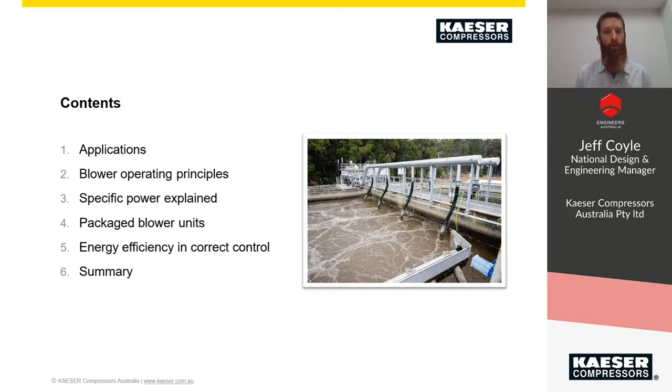Firstly, what I'm going to be going through: I'll cover some of the applications for low pressure blowers and air compressors, then go through some of the blower operating principles, and touch on specific power and explain why it's important. Then I'll go into packaged blower units and energy efficiency in correct control, because that's important for a modern low pressure blower station, and finish with a summary.

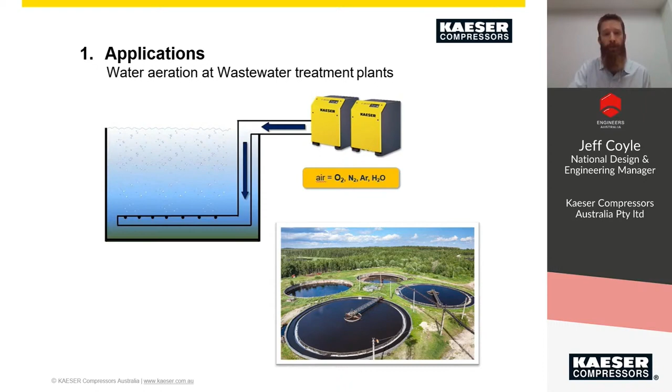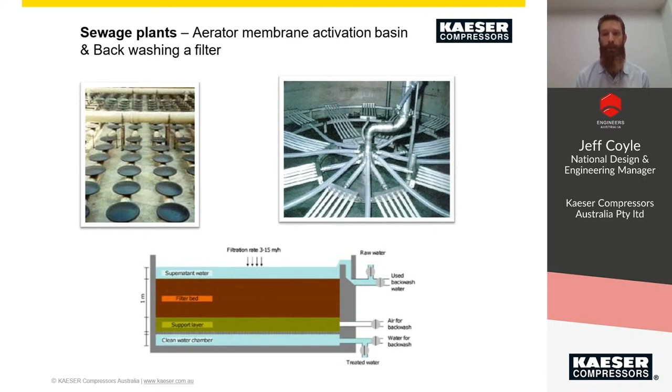Another application, also within the water treatment plant, would be backwashing filters. Often in some water treatment plants, there are very large filters with some sort of filter bed, and they blow low pressure air over them to get rid of all the contaminants out of the bed. That's what the bottom picture shows, a cross section of such a filter with air for backwashing. That would be a separate blower system. So again, these are probably the most used applications for low pressure air blowers.

When I talk about low pressure, I'm talking about an air pump of some description that would go up to a maximum of about 1 bar gauge, which is twice atmospheric. We class that in the industry as a blower, and I'll go into the different technologies that can produce that. A typical water treatment plant would use around half a bar gauge pressure to aerate water. Pneumatic conveying systems would probably be a little higher, maybe up to 0.8 of a bar, to transport that medium. So those are two examples.

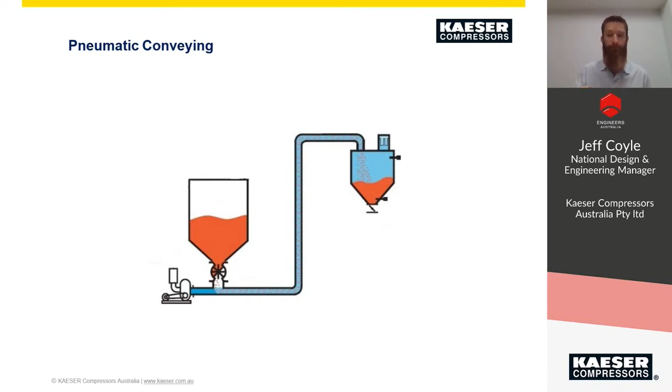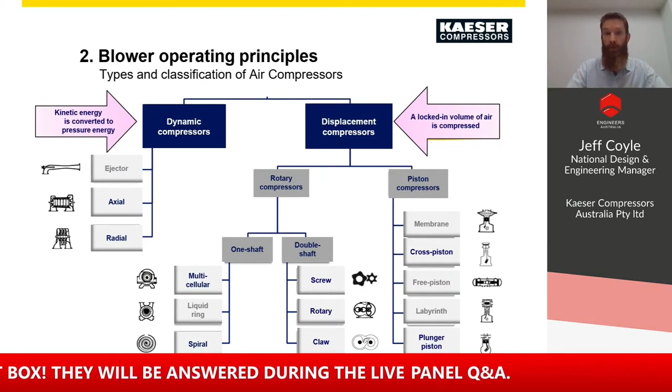Moving on to displacement compressors on the right, that's typically for higher pressures, but there are some low pressure blower technologies within that, really in the rotary compressors - you can see we've got one-shaft and two-shaft types. When we're talking about low pressure, probably the most commonly sold low pressure blower would be a rotary Lobe blower, which is a double shaft one, the second from the bottom. In old school terminology we'd call it a Roots blower, but Roots is actually a company that makes them, so technically it's a Lobe blower. We also have a screw compressor there, so you can get screw blowers, which I'll talk about later as well for the low pressure sector. Those are the two key ones, I'd say.

And then on the very right-hand side of this map, we've got piston compressors. I don't think you would use any piston compressors for low pressure applications, just because of the maintenance needed for a piston compressor. Piston compressors really come into their own at very high pressures.

That's where they're really used, where you multi-stage them to get extreme pressures for PET bottling or diving, those sorts of things. So I think the three main ones would be: a dynamic compressor, a turbo for the low pressure sector, as well as rotary lobe blowers and rotary screw blowers.

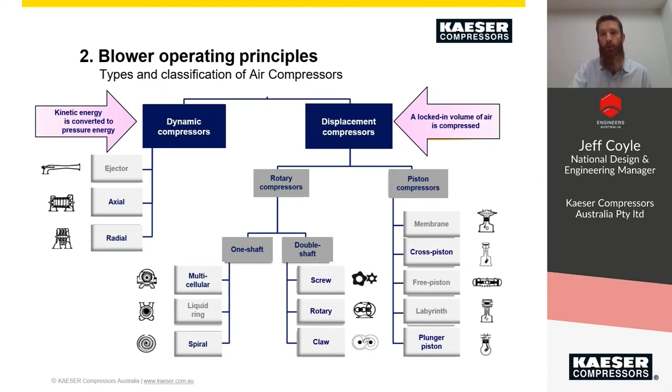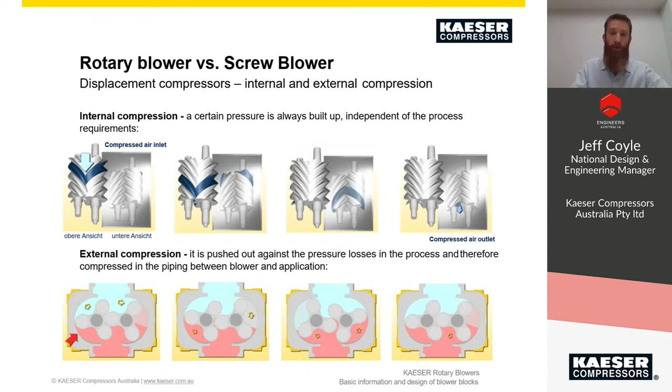So here's a little chart that shows a PD lobe blower versus a screw blower and where you might use them. Again this is very general, but for the purpose of educating fellow engineers, a screw blower you'd want because they have internal compression to work at pressures maybe over 400-500 millibar to get value for money. A PD blower can work right up to 1 bar no problem, but certainly comes into its own at lower pressures - so for an application at say 300 millibar, a lobe blower would be nice since you don't need that internal compression.

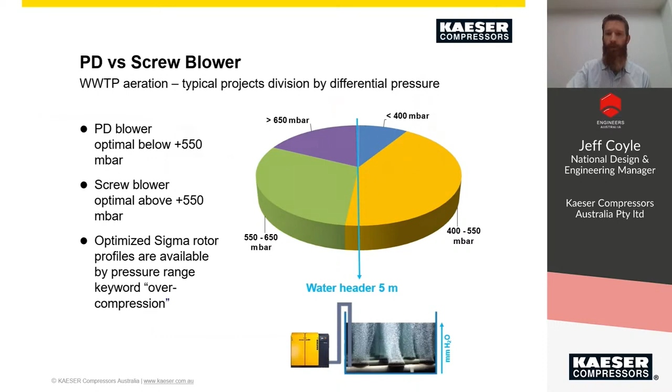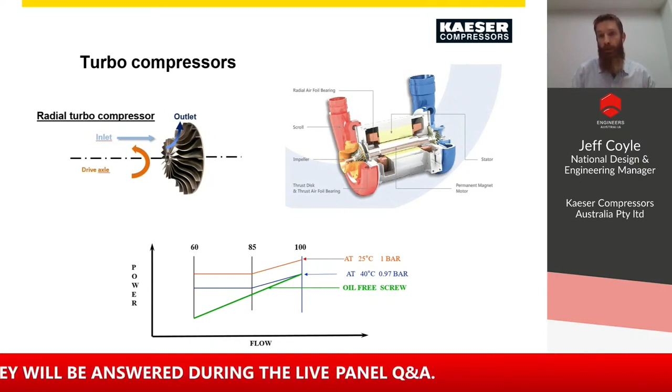And it gets sort of shot out the top there. So that's essentially how the turbo compressor works. It's no different to the turbocharger you have on your car, but obviously a fraction larger. And yeah, that's a turbo compressor.

As I said, they can be quite efficient at a set point, and that would be the key. I'll touch on that a bit later on. Also, they are affected by ambient conditions quite a lot because the mass of the air is crucial to creating the pressure, and with different temperatures, the mass of the air changes. With lighter air, so more humid air, the pump needs to work more to create the pressure because it's less mass. So yeah, there's things to consider.

So certainly, if you're looking at turbo compressors, you will need to speak to experts about how to go about designing that. I think the next presentation will touch on some of those key principles. But there is a lot more to think about with a turbo compressor in regards to design and how we go about design and keeping it quite smart in design.

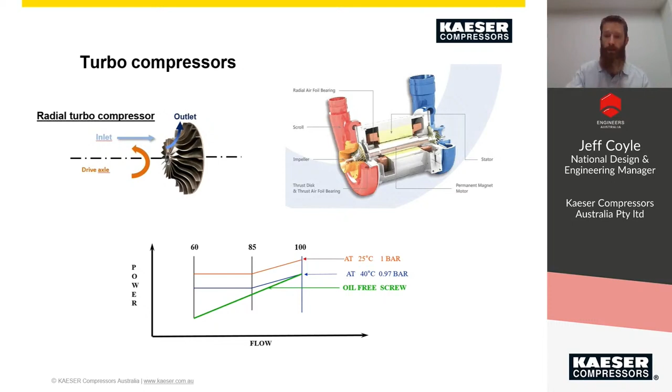As far as PD blowers, you can see they do use a little bit more power, but they are very simple and very cost effective to acquire and purchase. So there's always a trade-off, I guess, with anything in life. They each have their place, really. Certainly PD blowers are the most prolific out there that we see, for good reason. They're simple, they're affordable, and they're very easy to maintain and service. Whereas turbos are very specialised and can be quite costly to overhaul.

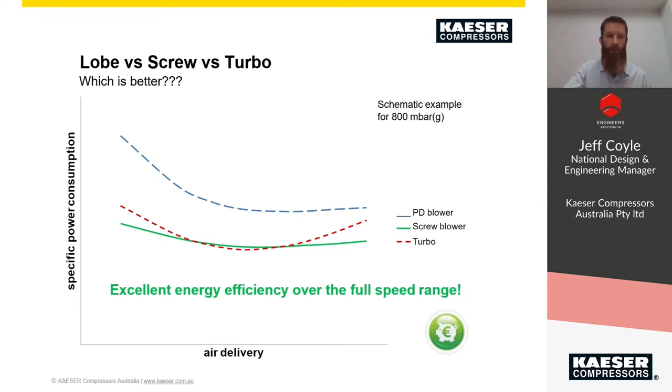So a bit of food for thought there as far as efficiency. And you can see that we've got specific power as our power measurement, which I'll talk about later on. Actually, right now.

Moving on to part 3 and specific power. So why am I talking about specific power? Well, obviously we want to make sure that anything we're designing, we're keeping it the most energy efficient we can. This specific power is a unit of measure that us in the industry use to benchmark equipment, electrical equipment, so that we can see that we're talking apples for apples, or we can make smart decisions on asset purchases based on power and those sorts of key critical factors.

So specific power is at the bottom there. It's explained as the total power input to the unit divided by the air output or the air delivery. So it's a unit essentially, and you want it to be as low as possible. So you want to have the least amount of power to produce essentially, say, 1 cubic meter, a measure of air.

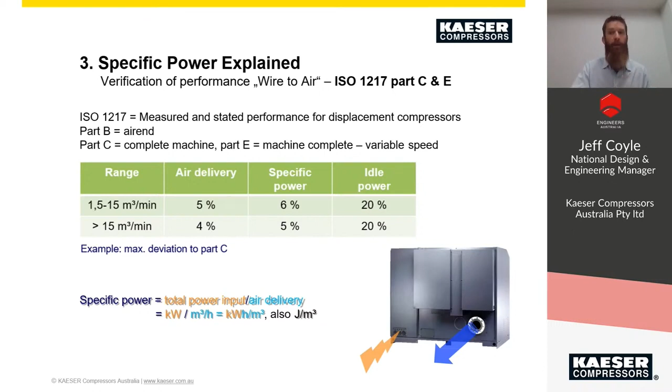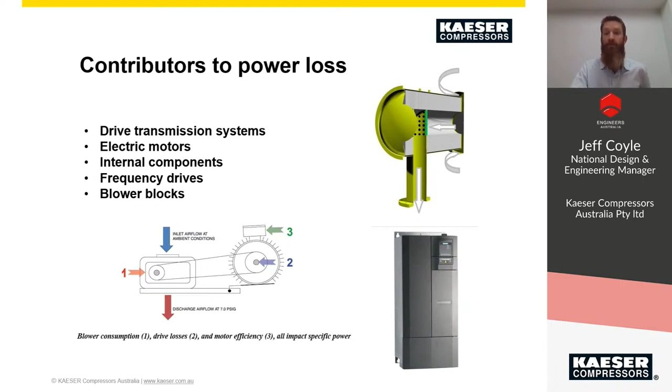So what affects power consumption? Obviously there's lots of contributors to power loss. We have drive systems, pictured in the middle as a belt drive system, and there's losses in that. Maybe you want to look at direct drive blowers, which are available. Electric motors come in different efficiencies. Internal components like the inlet silencer restrict flow and inlet pressure, creating more power usage. Frequency drive systems also have losses in them. And the blower itself, how refined and efficient the block is. They all contribute to power loss.

Why are we talking about this? Why am I here talking about low pressure blowers? Well, most towns and cities have water treatment plants because our sewage needs to go somewhere. The industry says 50% of sewage treatment plants' power usage is related to low pressure blowers. They have huge motors, sometimes over 100 kilowatts, and maybe 4 of them on site. They're huge power consumers. That's why I'm here, to create awareness that this is, in my opinion, the first point of call with a treatment plant, or even a manufacturing plant with pneumatic conveying. They consume a lot of power, so we need to highlight this - if you want to save energy, look to these pumps as a first point of call.

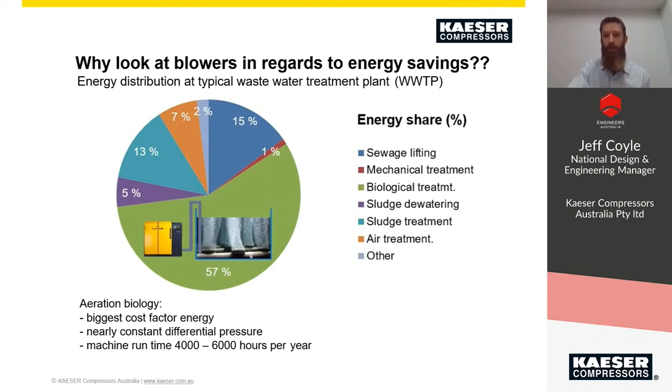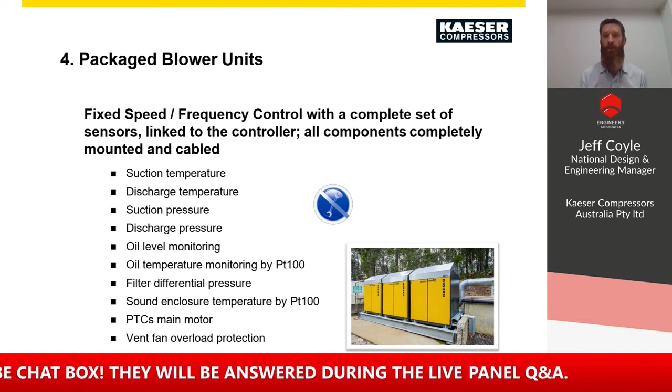So packaged units - this is more about the blowers themselves. A lot of them are custom made to order because we have different pressures and flows to consider. We have a lot of control in them these days - sensors and monitoring, PC-based controllers, and frequency drive systems. Monitoring and control is a big part of a modern blower station and keeping it efficient, because you can have the most efficient blower in the world, but if you're not controlling it intelligently, it's a waste of money - it could be running unnecessarily or switching too much, creating losses. That's why PC control, whether onboard controllers or a master controller managing big banks of blowers, is important. Looking to control is as important as anything in a modern air compressor station, whether high or low pressure.

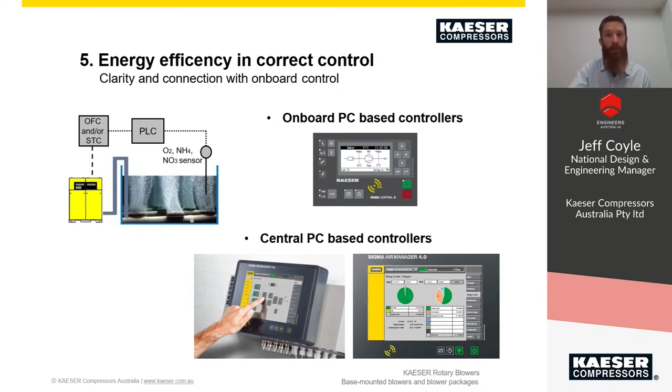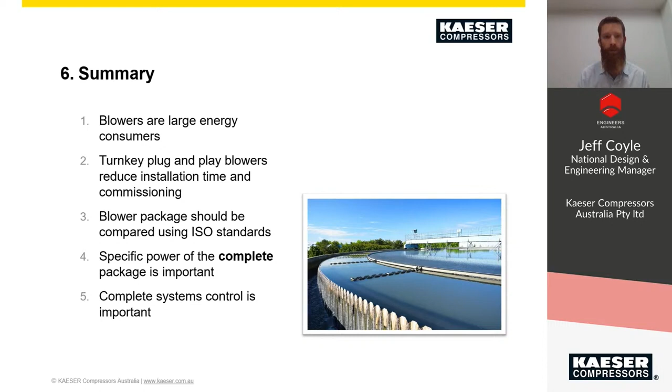If you need more information, speak to manufacturers or experts in the field, because it's a very important sector. That's a lot of information in a quick time frame, but it was a general introduction to low pressure blowers. As I said, they are large energy consumers, that's why we're here talking about it. There are a lot of different options out there: turnkey blowers, with or without frequency drives, and more. As engineers, you should always look to ISO standards for benchmarking - it's important that everyone compares apples to apples. Referencing specific power is key so we can look at the right figures when designing, and control is very important these days. That's it from me, thanks for your attention, it's been great to speak about low pressure blowers today.

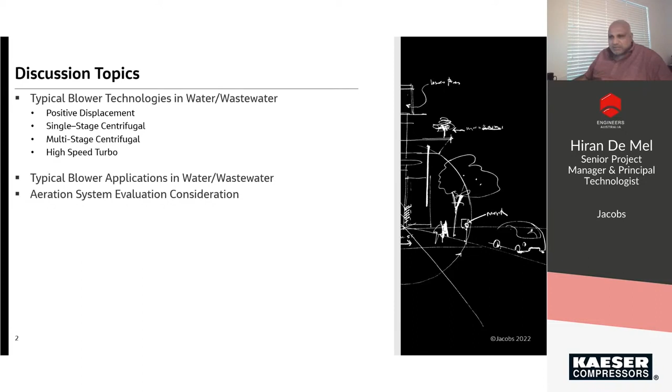Okay, so when it comes to blowers, I believe there are mainly two different kinds. There's the positive displacement blower, which is just like a PD pump, it's a positive displacement machine. And then there are centrifugal blowers. So as you see, there's positive displacement, and then all of the other three categories up top are all part of the centrifugal family of blowers, similar to a centrifugal pump. It has a rotating impeller that uses centrifugal forces to generate the pressure, whereas with the positive displacement blower, you have a rotor-stator arrangement that pushes the flow through the unit.

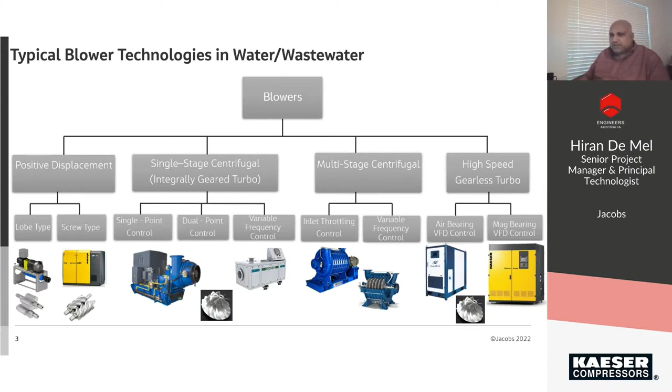Okay, going to the next slide. When it comes to rotary positive displacement blowers, these blowers have been around since the mid 19th century, and they were initially invented by, they were also known as Roots blowers, and Roots blowers—many different vendors have since adopted that design.

Rotary lobe blowers are ideal for small to medium size plants, variable depth reactors where the water level varies, like in a digester, or equalization basins where the water level fluctuates, or a filter air scour system where you want to use these blowers as filter air scour, or in a sequencing batch reactor where you have a lot of starts and stops.

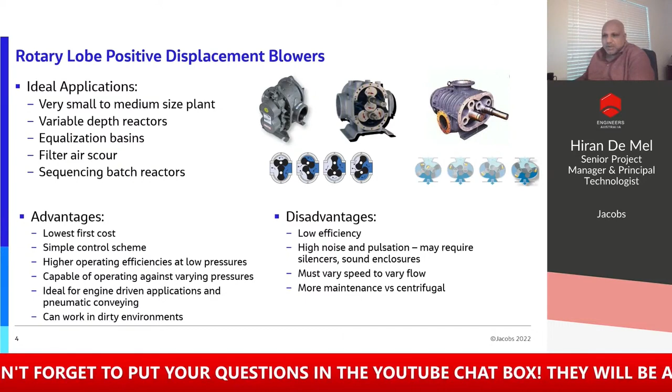The real advantage of rotary lobe blowers is that the initial cost is pretty low, they have simple control systems, high operating efficiencies at low pressures, and are capable of operating against varying pressures. They're ideal for engine-driven systems and also good for pneumatic conveyance.

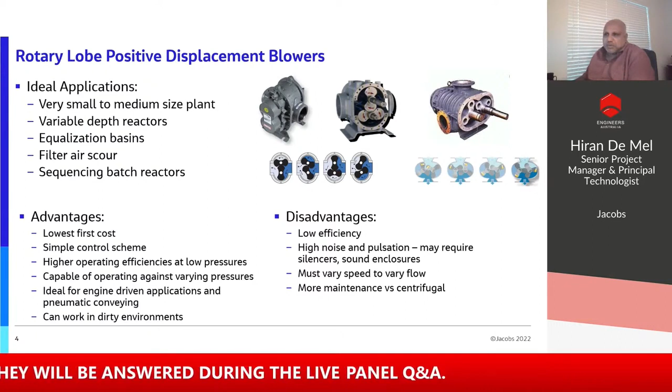Now, one of the other things I forgot to mention is that with the positive displacement blower, the air is just moved through the blower. You can see that in the diagrams just below the blowers.

You see the air moving essentially from left to right there on a rotary lobe blower, and with the tri-lobe on the right-hand side, you see them moving from top to bottom. But here's what's important to remember: you don't generate pressure in a rotary lobe blower. You just move air through the blower. The pressure is generated outside. There's no compression that happens. So whatever volume comes into the blower is moved out, but the pressure is generated outside the blower.

The real disadvantages with this blower are that the efficiencies are generally lower than with centrifugal blowers. They do generate quite a bit of noise, and there's a pulsation, because depending on the number of lobes you have, you could have a pulsation. So you do need to have silencers and sound enclosures.

The only way to really control the flow is to utilize a VFD, because you cannot control it by closing a valve. In fact, you shouldn't ever close a valve on a positive displacement blower.

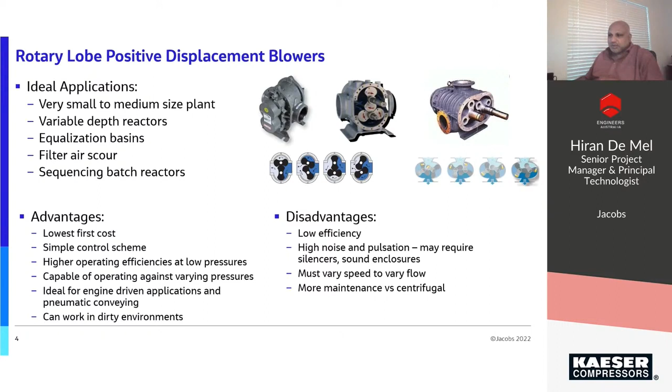Okay, the next blower type I'd like to talk about is the screw positive displacement blower. As I showed on the initial slide, it has a screw that provides some level of internal compression, which helps with some energy savings over a lobe type blower.

You can run these as constant speed blowers or as variable speed blowers. If you have a variable speed drive, you can adjust the flow. Otherwise, it's the same flow and there's really no way to control it.

So again, these are good for small to medium-sized plants. This is a little bit newer technology than the rotary lobe, and good in the same applications. It has a simple control scheme, higher efficiency versus the lobe type blower, as I mentioned. They're also a little less noisy than the lobe type blower, capable of operating against varying pressures, and typically have better turndown than centrifugal blowers.

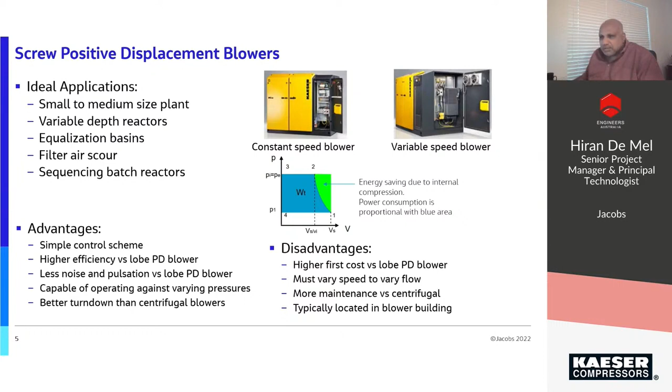Okay, next is probably the most popular blower in the industry, and it really is the workhorse of the industry. These multi-stage centrifugal blowers can be installed outdoors. You can have a combination of impellers as well, depending on what kind of pressure and turndown you're trying to generate. You can match different impellers and achieve a different shape of the blower curve.

Lower pressure ranges, you can achieve lower pressure ranges than with PDs, and better efficiency than PDs typically. They are direct drive units, and they go only up to about 3,600 RPM.

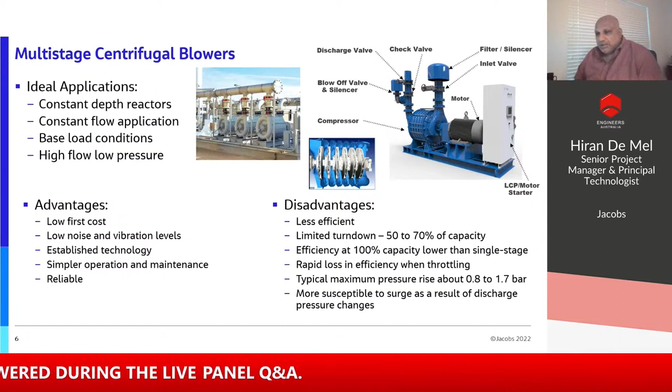However, you do need to pay attention to turn down capability, because a lot of the times you need to achieve enough turn down so you don't have gaps in operation. You've got to select the blowers so there is enough overlap, so you really need to look at the blower curves. This is true about any blower. You need to look at the curves not just at your maximum or minimum conditions under summer conditions, but under all conditions - winter, summer, spring - and look at your minimum, maximum flows. Make sure the blowers can achieve your minimum, maximum flows under any seasonal conditions, and that you don't have any gaps in operation.

So, the main advantage with multi-stage blowers is they're low cost, low noise and vibration levels. It's established technology, been around for a long time. Simpler operation and maintenance, simple operation and maintenance, and they're quite reliable. Plus, as I mentioned, they are running at 3,600 RPM typically, so they're not a fast-moving piece of machine. They really are the workhorse.

One thing really beneficial about multi-stage centrifugal blowers is, if you have a lot of high flow demand, especially in a bigger plant, you can use these for what I call base loading. You can use them along with some of the other blower technologies which provide better variable flow control. You can use these as your base load, and then use those variable speed or variable flow blowers to control the variable flow demands in your system. This way you can run the multi-stage blower at its most efficient point, and use those other blowers to meet your variable flow demand.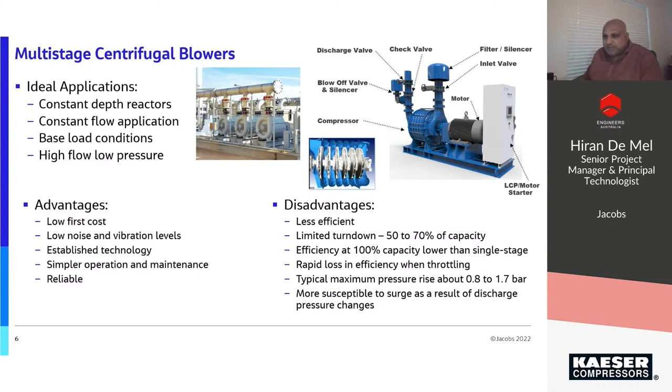Next, we're going to talk about integrally geared single-stage blowers. Integrally geared single-stage centrifugal blowers also have been around for a long time, quite popular. Globally, they've been used in water, wastewater applications, plus also in a lot of industrial applications. Commonly used in large plants. Now you're actually starting to get smaller single-stage blowers, but when they first came out, they were only available in the larger sizes.

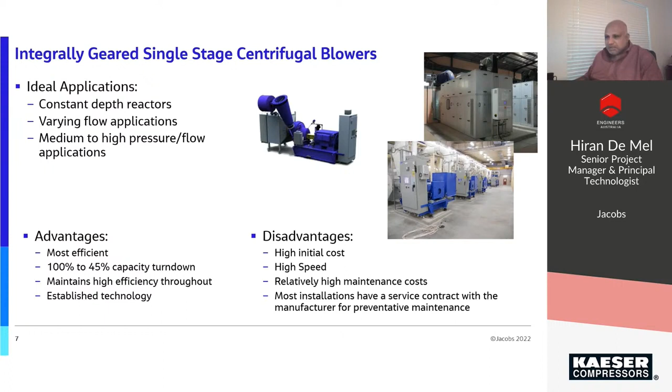Most installations have a service contract with manufacturers for preventive maintenance, especially if they are not familiar with the technology. They'll have some kind of maintenance agreement with the manufacturer.

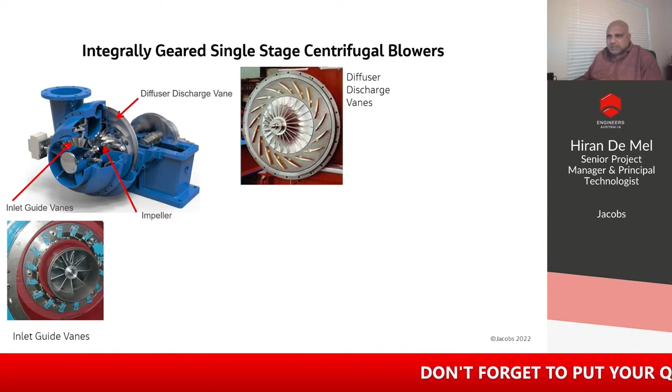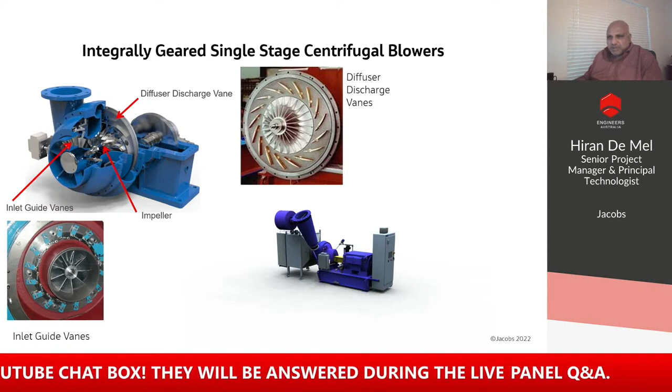Okay, next slide. I'm going to show you some cutaways of the integrally geared single-stage centrifugal blower. What you're seeing here is just a cutaway of the blower, and you see the inlet guide vanes, and then you'll also see the discharge vane.

I know it's probably hard to see in the picture, but you see the impeller. Just around the impeller, you'll see the discharge guide vanes that control. There's an inlet guide vane that can throttle the amount of air that comes into the blower, and actually it shapes the air coming into the blower towards or away from the impeller, so you can control the flow that way.

And then the diffuser discharge vanes actually adjust the shape of the curve of the blower curve, and you see a blow-up of the diffuser discharge vane.

So in the blower package here on the right bottom, you see the different components that are there. I'll just flip through it real quick.

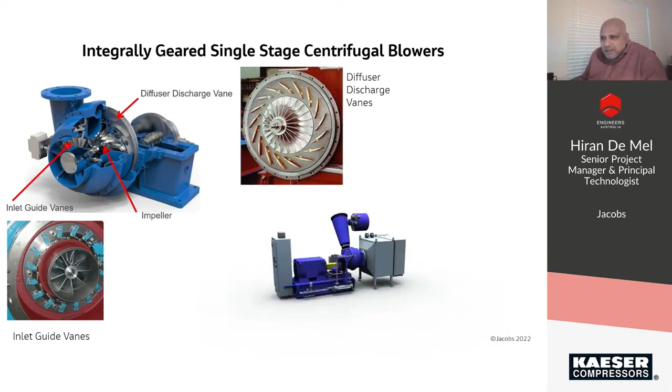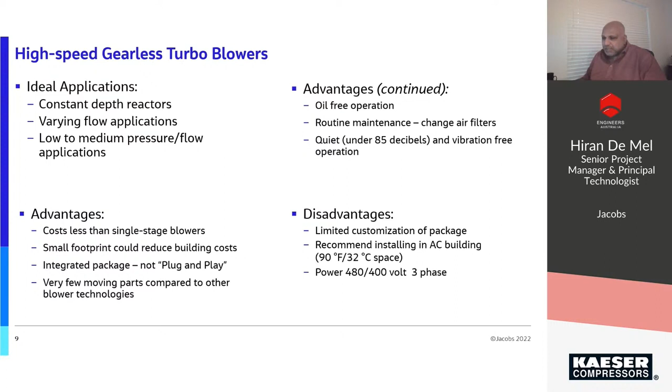I don't necessarily advise people to install these blowers outdoors because, as you will see shortly, there's a lot of electronic components that need to be protected, just like in a typical electrical room type installation. Retrofitting in an existing facility can be a challenge, but we do it - you have to pay close attention to what the environment is like and where it's going to be installed.

So what's in this high-speed turbo? I mentioned that there's a lot of different components. You do have a motor and a blower, just like you do with any other blower.

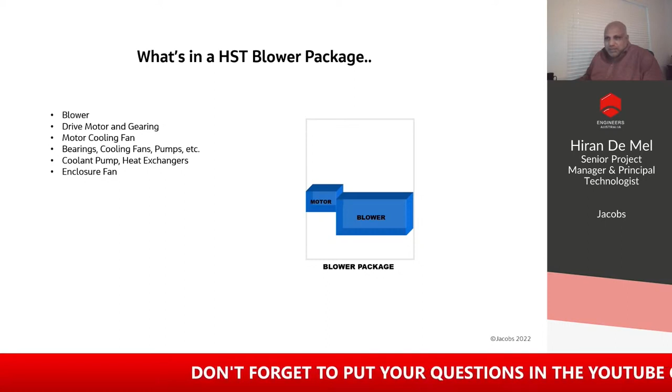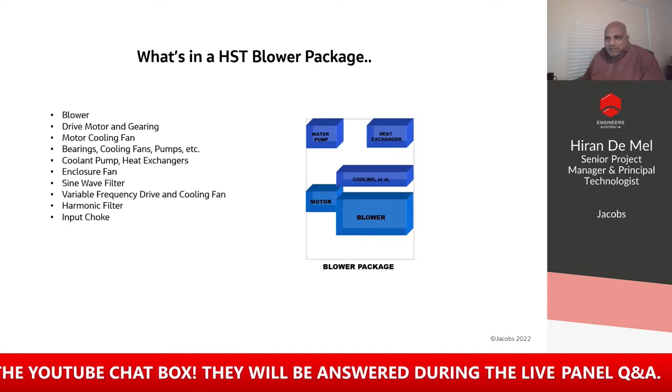However, you have a motor cooling fan, typically, and you have bearing cooling fan, pumps, coolant. And then you also have all kinds of electronic filters like sine wave filters, variable frequency drive, harmonic filters, input chokes. All of these are electronic components, all in this one box. And also local control panel, PLC, or process HMI controls, and miscellaneous electronic and power transformers.

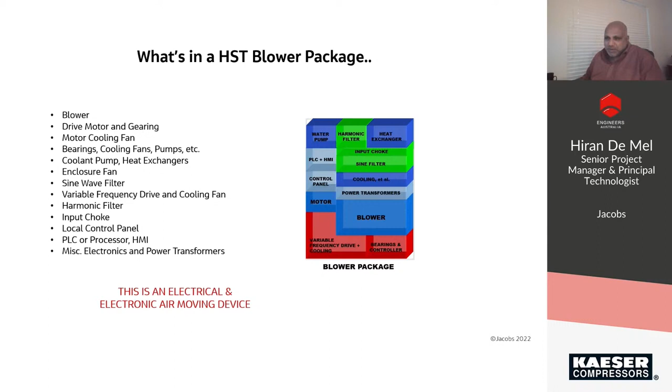So I actually refer to this as an electronic air moving device. It's not what you consider a typical blower. The blower is just the motor and the blower, but look at all of the other components that are in this package. So this is why I say you have to really pay attention to where you install these blowers and what kind of inlet air you have coming into the blowers.

Okay, this is a typical high-speed turbo blower. I mentioned there's two different configurations. This is a typical air-bearing machine. You see the cutaway, or you see the one picture there on the bottom right hand. You see the blower components, and then also the electrical components. You see that's a VFD, and then again with the package you got a lot of different components that make up the blower.

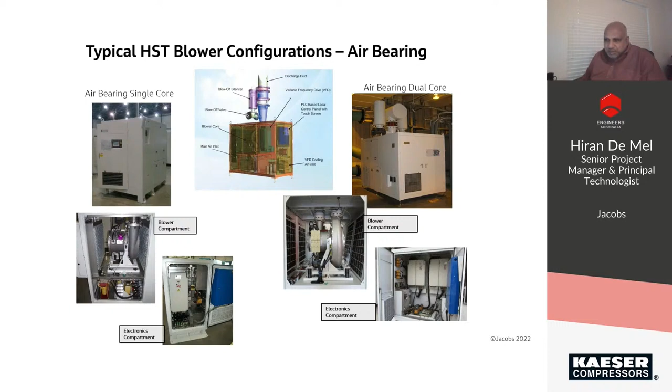And this is another view. This is where actually in this particular blower setup, you have two blowers in one compartment. And there you have another picture of the electrical compartment with the two VFDs in there.

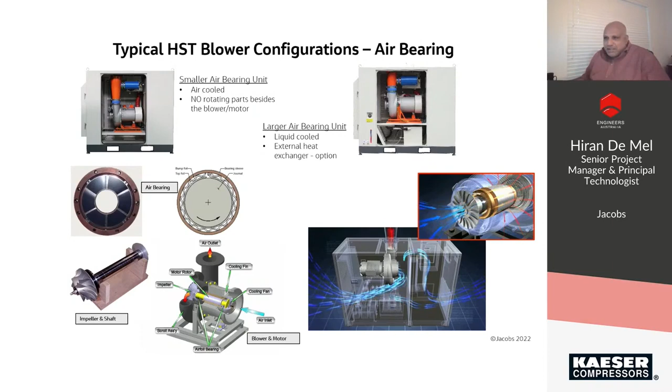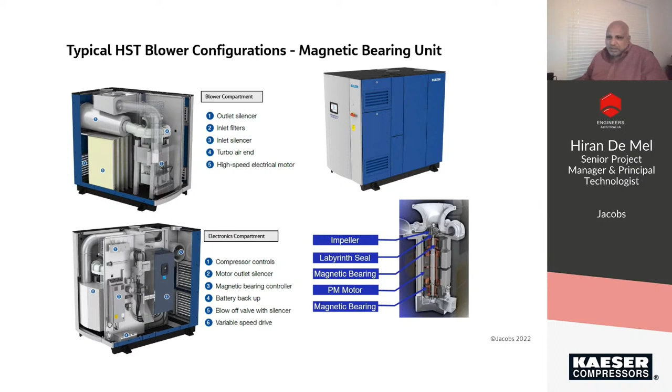This particular blower is a high-speed turbo blower that is a magnetic bearing. And the magnetic bearing is here on the bottom right hand. There's an impeller, and then you have the labyrinth seals that go around it, and then you have the magnetic bearing, and you also have the permanent magnetic motor, and then you also have another magnetic bearing on the bottom. So again, this particular blower rides on the magnetic field, which keeps the blower shaft suspended, whereas the previous one, it's an air bearing that actually keeps the shaft suspended and rotating. And then, of course, there's a cooling fan as well.

These are some pictures of typical installations of air bearings on the left-hand side and mag bearings on the right-hand side. As I said, I prefer to install these in a conditioned space. The bottom left-hand picture, you'll see there's an AC unit mounted onto the control cabinet of the blower. And I normally, especially if the building is not air conditioned or conditioned in some way, would recommend installing those air conditioning units on the side of the blower control cabinet. That helps to keep the controls—think of it more like an electrical room. Typically electrical rooms are conditioned in most wastewater plants.

On the right-hand side, you see a mag bearing typical installation. One of the things I want to show you in the back wall there, you see that those are all harmonic filters supporting these blowers.

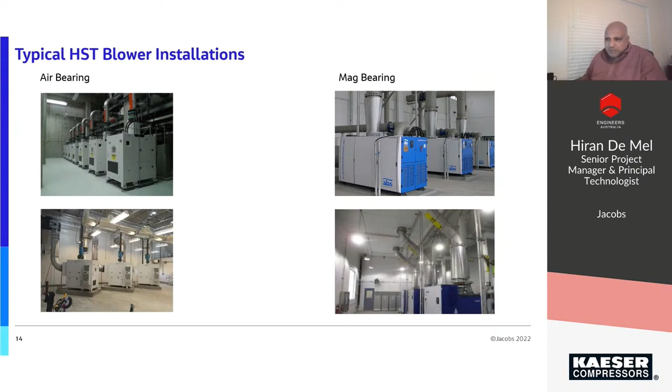Lastly, I would like to leave you with a couple of references.

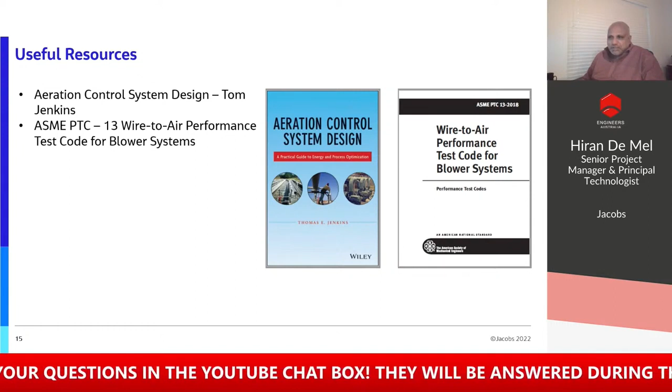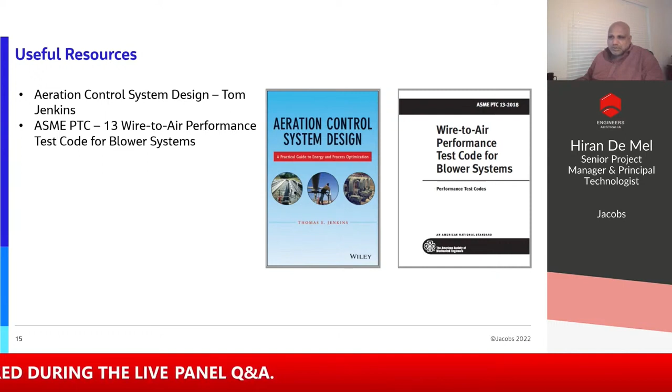The first is a book written by a good friend of mine called Tom Jenkins. He's also one of my folks I work with on blower stuff. This is a very good book called Aeration Control System Design. It's a very practical book, so I would highly recommend it if people are interested more in blowers and how to size blowers, how to control blowers, or just the practical application beyond what you would learn in school.

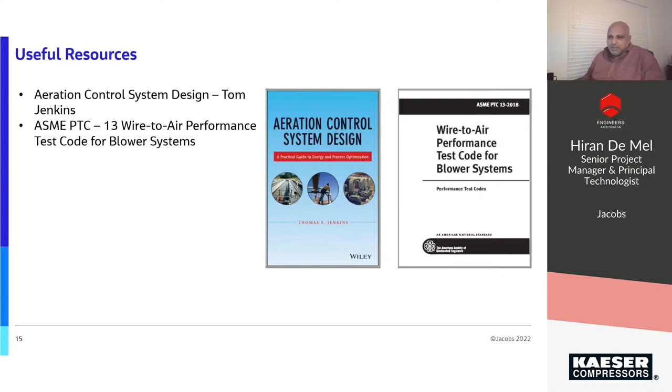Secondly, there's a document called the ASME PTC 13 Wire to Air Performance Test Code for Blowers. This is a document that I have worked on with a group of engineers and blower vendors in developing. It truly looks at the wire to air performance test of a blower, and I think it's probably the only document that really captures all of this and how to test blowers. It also includes a lot of theory about how to look at different blowers, and it helps you evaluate different blower technologies with one test code. Thank you.